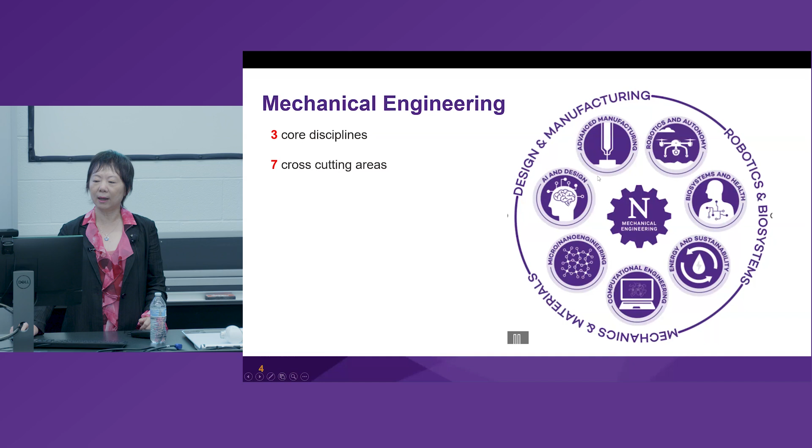And I'm in design manufacturing, and we have robotics and the biosystem group. So we're working on what we call 7 cross-cutting areas, including AI design, advanced manufacturing, micro/nanoengineering, and so on. We have a slightly bigger department, maybe 31 core faculty, and 10 of them are jointly appointed with other departments.

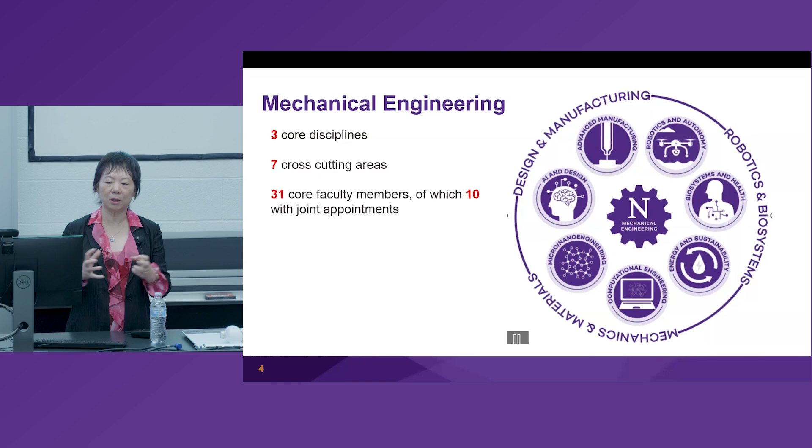So it's very much Northwestern's culture, enabling and encouraging collaboration. One thing I'm very proud of in my department is a really high scholarship standing. We currently have 6 NAE members. Actually, I think 5 of them, all 6 of them, were elected in the past 7 years, because our previous generation of NAE members either retired or some of them passed away during the pandemic.

Also, NAI stands for National Academy of Inventors, so we also have some people who are very great innovators, and 8 journal editors-in-chief.

You may be wondering about the ranking. We like to always use the research.com ranking, which ranks mechanical and aerospace together. So far, Northwestern has been ranked number 6 in the world, and I believe this ranking is very much based on citations. US News, oftentimes, is based on the rating or ranking of the department chairs.

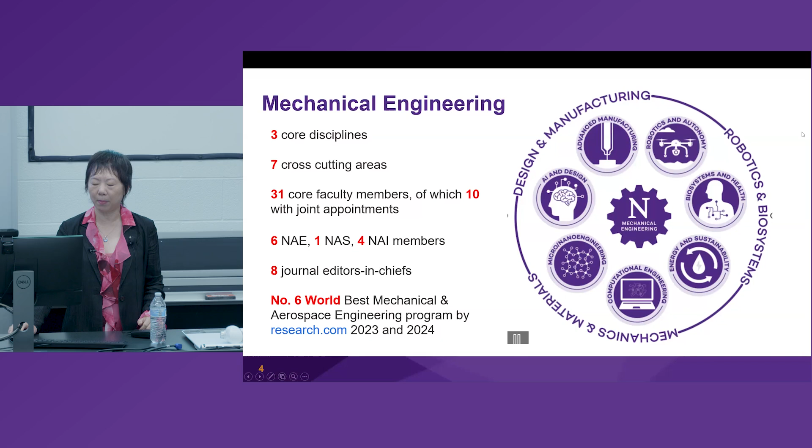Oftentimes we feel the size helps. In our case, our size is much smaller than some of the high-ranked departments. So I'm very proud of the department and working with a lot of talented faculty and students.

So the past year has been really exciting, as we actually started working on 2 new engineering research centers. One is the one that was awarded this year, called HAND. This was initiated by my robotics colleague Kevin Lynch at Northwestern. It's a center looking at building an artificial hand, a robotic hand in this case, to augment human ability.

So these are AI-powered methods to empower or build very dexterous, meaning very light, compact, robotic hand systems that can work on different tasks, for example in manufacturing, in healthcare, as well as jobs that are very dangerous to ask humans to do. So this center is about building this robotic hand.

And this is exciting because this is the first Northwestern-led ERC, and you can see some of the other collaborating institutions. Usually an NSF ERC involves 10 years of effort and involves at least 5 or 6 different institutions.

The one that I'm more involved in, that was mentioned earlier, is called HAMMER ERC. That stands for Hybrid Autonomous Manufacturing, moving from evolution to revolution.

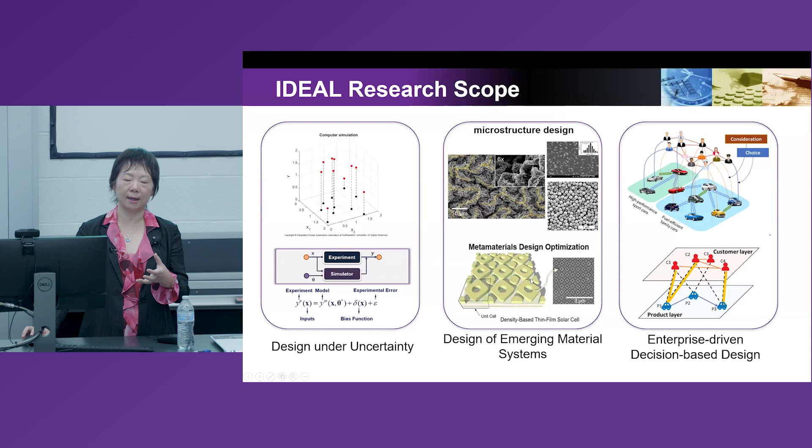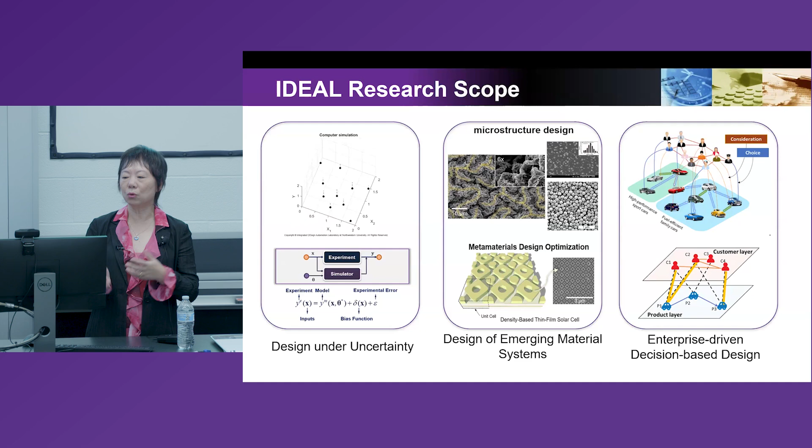Those material systems can be microstructures at a very lower scale level, like nanoscale, or they could be metamaterials that focus on architecture design. There's a big difference between these two kinds of systems. First, the manufacturing techniques are totally different. For metamaterials, you can use additive manufacturing to precisely produce the architecture. But for material systems, methods like extrusion or polymer mixing lead to very stochastic behavior of the materials. They look like a random material system, but actually there's an important pattern behind it. So one is stochastic, one is deterministic, and the methods to support them can be very different.

So today, the topic I'm going to focus on is really showing you a wide range of methods we are using or developing.

But first, a few words about why this topic is important. Advanced materials refer to systems that can achieve superior performance, and they've been used widely in energy, defense, and even healthcare. In this example, it's a magnetic-driven robot that goes into the human body, like for cleaning - this is actually robotic endovascular surgery. So this is a programmable material system.

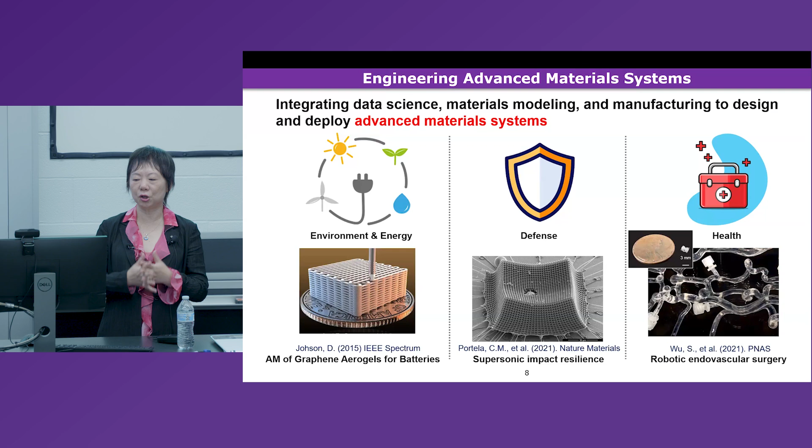There's a lot of good impact, but if you look at this topic itself, it's not just engineering design. I view this as an interdisciplinary topic, because I've been heavily collaborating with people in materials, manufacturing, and mechanics during the past decade in order to show that we can really design something that achieves the performance we want.

Looking at the portfolio, I'm listing here some examples of systems we've been working on, and underlying this is a wide range of funding agencies. Another reason I got into this field is that there seems to be growing funding put into this area from a wide range of funding agencies. Also, uncertainty methods play a big role, which I'll show you later - why uncertainty techniques are useful here.

On the left is what we call design of material. Those are things that can range from microelectronics, very inorganic systems, to soft material systems like polymers and composites, and in the middle can be things like MOF, metal-organic frameworks. These are very different material systems I've worked on with colleagues from different disciplines, and the focus can vary - some are more at the atomic scale level, some more at the nanoscale level. Interestingly, the methods we're developing are generic enough to be used for many of these different systems.

On the right is what we call design with material. I think most of us here are mechanical engineers - that's probably the domain we feel more comfortable with, right? Here, oftentimes we're given one material and we design the structure. It could be a composite structure, it could be 2D, like a solar cell surface pattern. I'm showing some other metamaterial applications such as mechanical cloaking and energy absorption. So the focus here is architecture design, structure design.

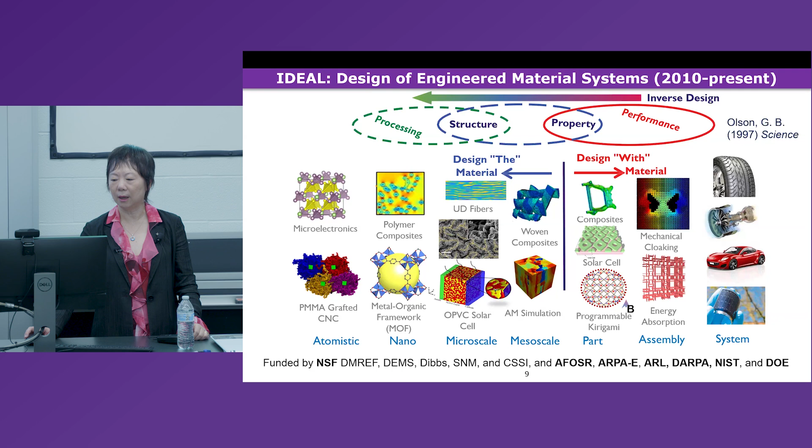In addition to material design, we also need to design the shape, topology, or size of a structure, which has important implications on its performance. Related to the slides I showed earlier, material design itself is often confined or restricted by what manufacturing technique we have.

In recent years, with the HAMMER ERC, I'm getting into a new paradigm called digital twin. This is a paradigm that creates digital replicates of a physical system and uses that to do decision making to guide the operation of a physical system.

Manufacturing is a dynamic process - you have to decide what kind of laser power you use for additive manufacturing. But building digital replicates is not the only interest in digital twin. What's important is this link between the physical and digital system, continuously using information or data collected from the physical system to do what we call model predictive control, using optimization and physics-based models.

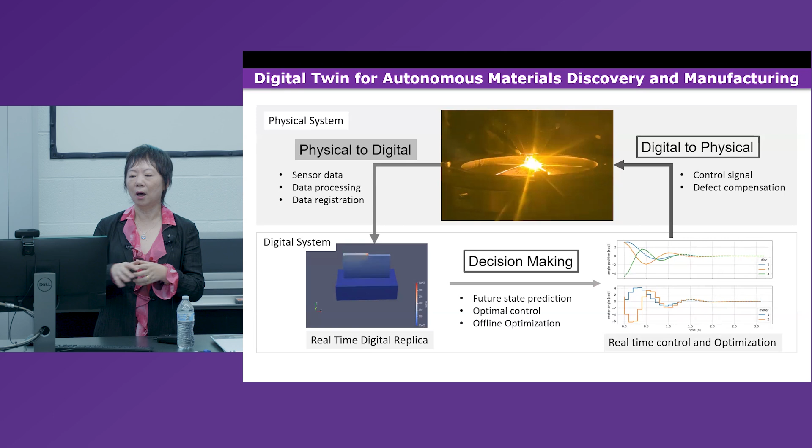I'm not going to go into details on this topic, but if you're interested, there are papers already published on digital twin. Today I'm going to talk mainly about structural, composition, geometrical design, and how we combine them, not so much on manufacturing process design.

I want to use turbine blades as an example to show you the design research now - the challenges we face, and the interesting aspect of designing what we call heterogeneous material systems. Turbine blades are a good example where at different locations, like the bore, the rim, the blades, you actually want the material to be different.

You want the inner side to be fine grain for strength and fatigue resistance, and the outer side coarse grain for creep resistance. And then for the blades, you're looking at a single crystal material for strength, creep, and fatigue.

An ideal system actually isn't only 3 materials - it could be continuously changing. We call this continuous material design, and I'll show you some results later on. It's in a DARPA-sponsored project called METAL.

It's exactly the kind of system where we need to integrate material with manufacturing capability, which is additive manufacturing - it can deposit different material, even different composition of different alloy, at different locations, and try to achieve the best performance.

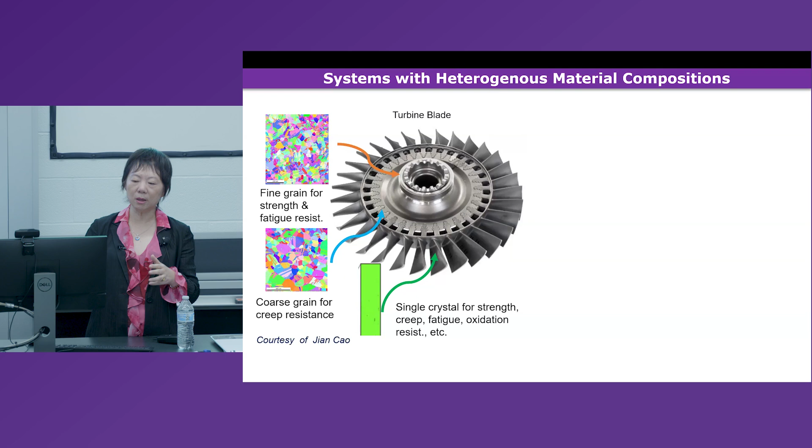This is important not only from the performance point of view, but also from the cost point of view. Because from the performance point of view, you'd say put the most important critical material everywhere, but that's very costly. So you want to use what we call earth abundant material, rather than the rare, costly material.

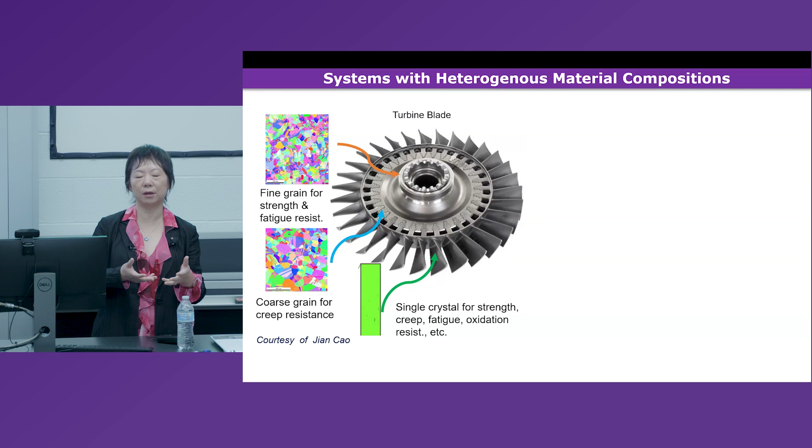So how do you do this distribution of material? That's a big optimization problem.

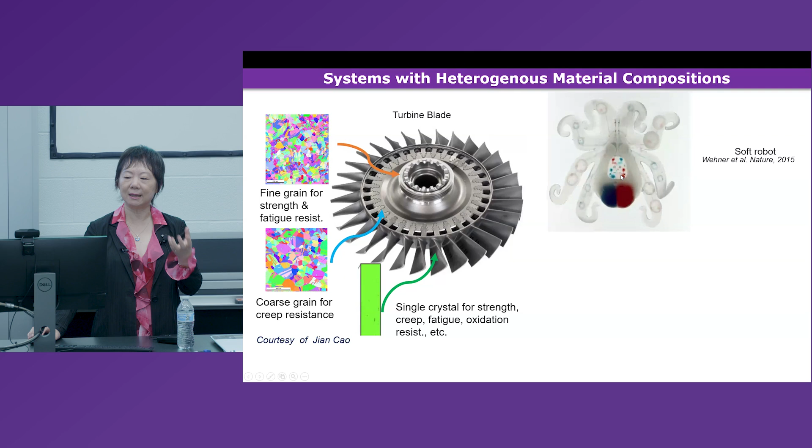If we look at soft material - you've probably heard about soft robots - they deform to a certain desired shape, and this can be accomplished by controlling the strain at different locations. Each location of the structure will have a different desired strain, and this strain can be achieved through different structure design.

So to achieve different material properties, you can do this by two means. First, you can change your material to achieve different property. Second, you can change the structure - that's the key idea of metamaterials, playing with the architecture to achieve different properties.

In this case, it's an optical device where you don't see the human hand - it hides, because surrounding this device, in this ring, there's an optimum design that puts different properties at different locations. So in this case, it's optical related - with this structure, when light comes in and goes out, you won't see anything in the middle. It basically hides the object by controlling the property in the surrounding area.

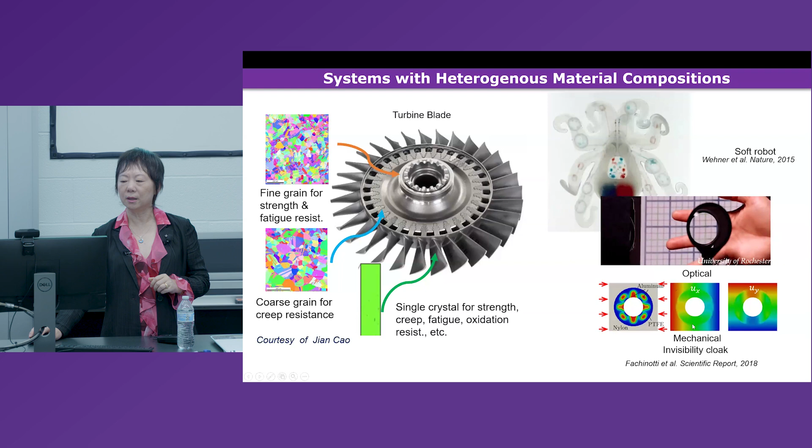The answer is it highly depends on the manufacturing processing technique you're using. But some methods are much better than others because they have smaller dimension, or what we call reduced dimensionality representation. So in our research, we looked at how we reduce the dimension so we can handle the optimization more effectively.

There's also a mixed variable problem, where some of the variables are continuous and some are discrete, like what kind of filler we should use, what kind of matrix we use for the composite. All these are discrete choices. So you have this mixed situation that you have to optimize together.

And if you've done optimization or taken an optimization course before, you know that when you have a mixed variable problem, the search suddenly becomes very challenging. Historically people use genetic algorithms, and I will show you a method we developed that we think is more effective than genetic algorithm.

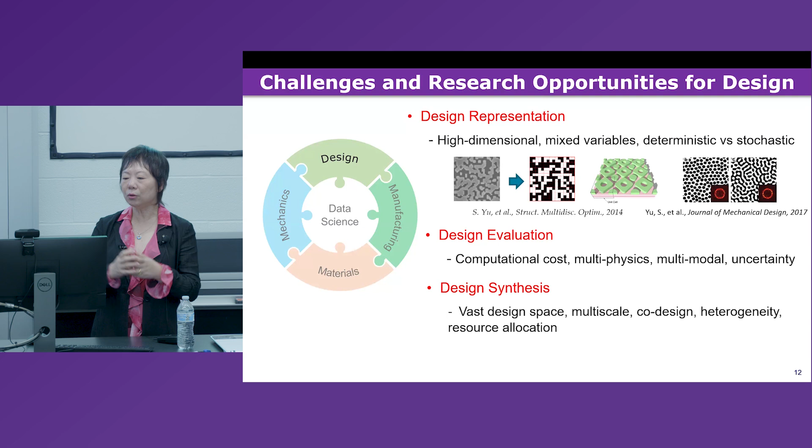Finally, there's the challenge of design synthesis. Synthesis means, given the requirement, how do we explore this space inversely? Analysis is usually forward, synthesis is inverse. How do we explore this vast design space?

And oftentimes it's multi-scale—nano, meso, macro. And how do we do co-design, meaning material, device, process, geometry? There are many co-design aspects, and the heterogeneity aspect I talked about.

Finally, it's a resource allocation problem: you have to decide whether you want to expend more effort towards collecting more data from computer simulation or collecting more data from physical experiments, so that you can make more informed decisions. So we view that as part of the design—it's not just design artifact, but we're designing the process of data collection.

That's something I feel my group is doing that's a unique aspect compared to many existing works that only look at artifact design—we look at the data collection too.

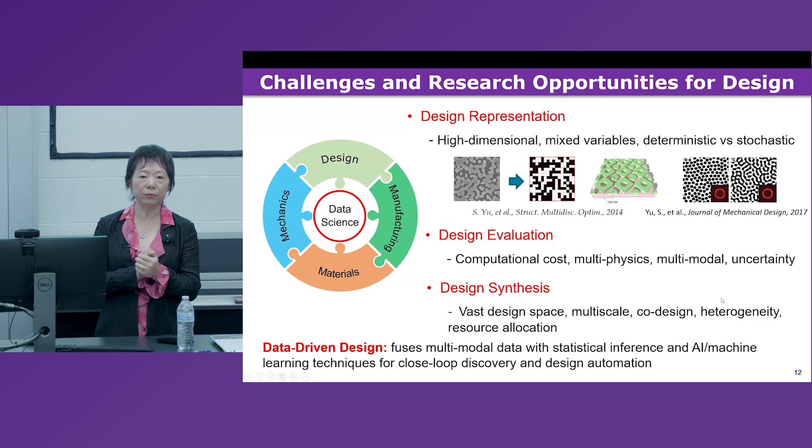So data-driven design methods basically integrate all this using statistical inference and also AI. I purposely listed both because statistical inference techniques usually deal with small data problems, while AI methods, which some of you are getting more into learning, are normally used for large data problems. In the design material system, we think both are useful, but they play different roles in the process we call closed loop discovery and design automation.

So now I'm getting into the main part. I already spent 20 minutes, but I will quickly show you 3 different systems and some different methods behind them.

One is starting with nanocomposite, focusing on morphological design and choice of composition, processing, and synthesis method. This goes into metamaterial, which focuses on architecture. The most recent work we're getting into is programmable material systems that are responsive to external stimuli—we call this intelligent material systems that can react to different stimuli such as light and temperature.

And then can accomplish multifunctional behavior—some people call this a multifunctional material system. So step by step, the nanocomposite system is a problem I'm giving you an example of here, called the nanodielectric. It's an already finished DMREF project working with people doing both modeling and experiments.

The design decision is the composition. In the composite case, it's what kind of polymer, like either PS or PMMA. The synthesis method here includes a surface modification technique, and we have 3 different types of technique we're considering.

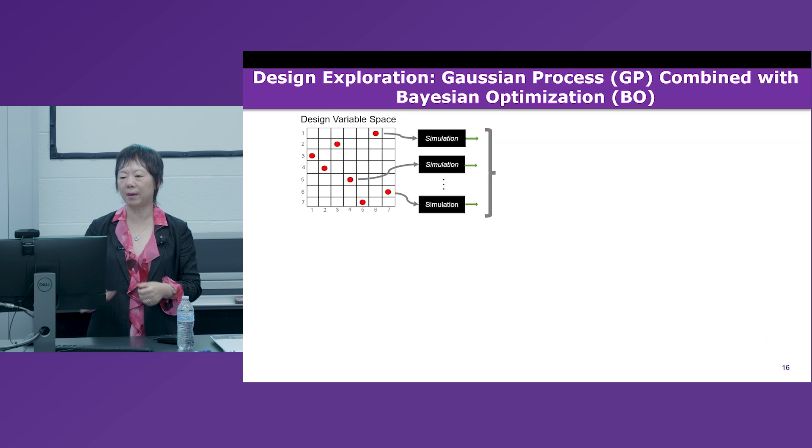We found that this method is very helpful, useful for small data problems. This is what I call the statistical inference method. You start with some data collection and use a Gaussian process to build a machine learning model. This model has the capability to tell you the uncertainty at locations where you don't have data. You can see that with 4 data points, assuming a single variable, there are infinite ways the curve can pass through these 4 data points - green, red, blue, right?

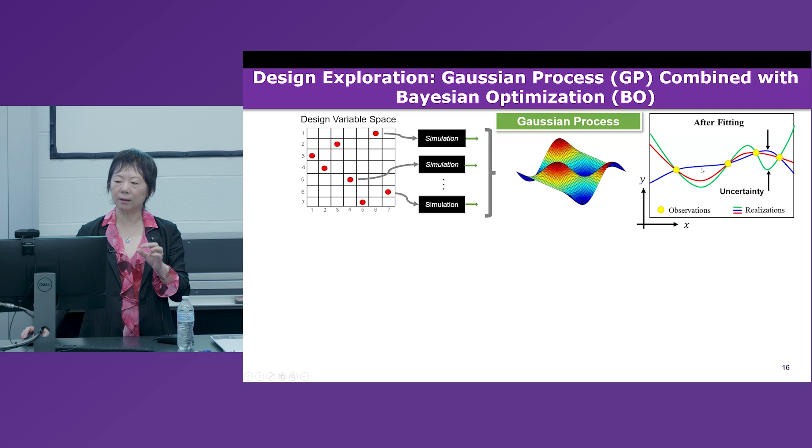But this method, Gaussian process, uses a correlation function. It can tell you at the location you don't have the data, based on the distance between the data as well as the behavior, how much is the uncertainty. So with that information, we could now decide how we pick the next data points.

This is done by something called the acquisition function in Bayesian optimization. It makes a trade-off between exploring more in the space, which reduces the uncertainty, versus trying to optimize the behavior based on the current function. So here we're doing minimization, let's say.

You can say that this point is the optimal result, right? But on the other hand, because the model is still in the early phase, there's a question - maybe somewhere here there's huge uncertainty, and the behavior can be even better than what you currently have. So it's a trade-off between exploration and exploitation. That's called the acquisition function, the key idea in Bayesian optimization.

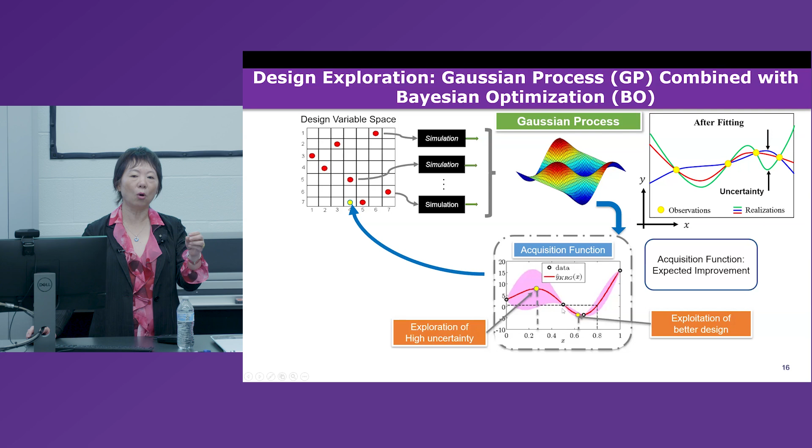So you pick the next point by maximizing this acquisition function, add it to the data pool, continuously update this model, and at the end you will find the so-called global optimal solution. The global solution can handle very highly nonlinear behavior.

So our extension of this method is that it has been primarily used for continuous behavior. It cannot deal with inputs that are qualitative. So here we are introducing a new set of variables called t. x is continuous, and t is the category variable.

I'm giving an example here - the category variable, say, can be the shape of the structure. It could have 3 different possibilities there. Instead of using a physical descriptor, where we don't have a good idea what the underlying descriptor is to describe the behavior, we actually create a latent space, an artificial set of continuous variables.

In this case, identifying the location of this different level in this space becomes an additional variable when we try to do the maximization of the maximum likelihood function. So conventionally, when you only have continuous variables, you identify the variance, covariance, and roughness parameter. Here we're introducing z, the latent variable. In this case, 2 coordinates, meaning each of 3 levels means 6 latent variables we have to add to this curve fitting or optimizing the likelihood function.

Once this location is identified, it's a supervised learning - it has a physical meaning. When the 2 levels are very close to each other, it means their impact on the response of interest, Y - which can be the property you're interested in - the correlation is very similar, or the impact is very similar. When the level is very far, like triangle is very far from this shape, it means its impact on property is very different.

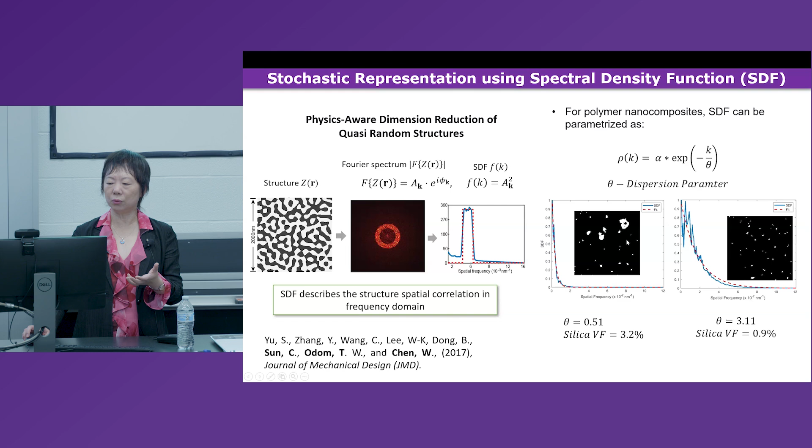For the nanodielectric material, what we did is that my collaborator, Linda Schadler, her lab actually produced many of these materials using different processing conditions. We did image analysis, and later on we found that this shape of the spectral density function, with 2 variables - one is the dispersion parameter, another is the alpha coefficient - together with volume fraction, are sufficient to represent different types of microstructural morphology.

So for morphology design, we only need 2 variables in this case: theta and the volume fraction, and these are continuous variables.

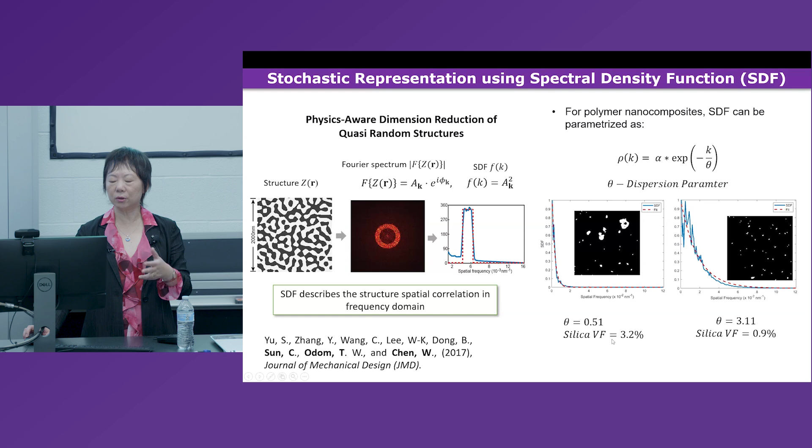Using the GP method as well as Bayesian optimization, here what I'm showing is the process of how the data are picked. Initially we start with some data points that are randomly selected, which we call the random initial design. After that, using this acquisition function, it starts to pick points.

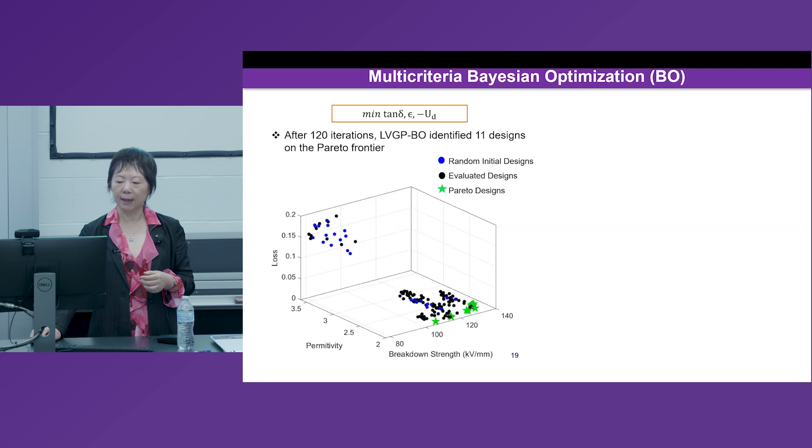What's interesting about the contribution of our work is that we can deal with disjoint design space now, because we have this smooth function called LVGP, latent variable method, that can link the two disjoint spaces. In this case, the disjoint spaces are related to different kinds of polymer. On this upper corner is all PMMA, and the lower corner is all PS. The surface treatment method is actually spread around.

This is the Pareto frontier that looks at 3 different criteria that we're interested in. The green points, the star points, are what we call the Pareto frontier. At the end, these are the good designs that you can choose, showing different kinds of morphology that you have.

You can imagine this could be a method that can guide either a purely physical experimental-based process, or simulation together, simulation only, or simulation with experiments. In our case, we actually have both simulation and experiments, and we are exploring different kinds of morphology and different kinds of polymer choice.

We found that compared to genetic algorithm, this is our approach using Bayesian optimization. It is statistical because it depends on the initial design being random, right?

Initially we pick like 30 sample points, so that could lead to different processes. We tried many different repeated, different starting samples and looked at the statistical behavior.

On the right is genetic algorithm, which also randomly explores the space. You can see that the Bayesian optimization is much more robust compared to the genetic algorithm.

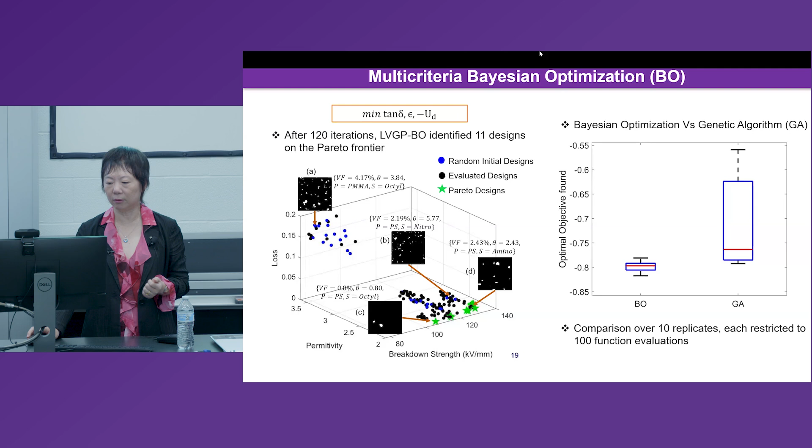So the data source, or the low fidelity, high fidelity, can be viewed as different levels, and now it can start to explore collecting data from different sources and different fidelities of model. So that's an interesting extension.

So I talked about the nanocomposite, which is a very stochastic system. Now I'm switching gears a little bit to talk about, if the material is already designed, how do we design the architecture?

Here the case is really high dimensionality, because if you think about structure design, if you think about a finite element, each element has a choice of either 0 or 1 or something else. This is the area where we found machine learning techniques are very useful. The high-end techniques like generative modeling, CNN, are becoming very useful.

First, metamaterial systems - it's an interesting kind of system, you've probably heard about the negative Poisson ratio, right? A structure that can achieve negative Poisson ratio. This kind of system also has very good energy absorption behavior.

It could be used in an auxetic structure for stent surgery that has both - it's like a spring structure, right - very strong, and at the same time it can easily and flexibly refract into different shapes.

In the optical area, there's optical metamaterial, acoustic metamaterial. This is something used in civil engineering.

You could actually - this is futuristic, we haven't seen that yet - design the concrete highway into this kind of structure. This is amplified so it could actually take the vibration of a car and convert it to energy. So it's an energy harvesting kind of structure.

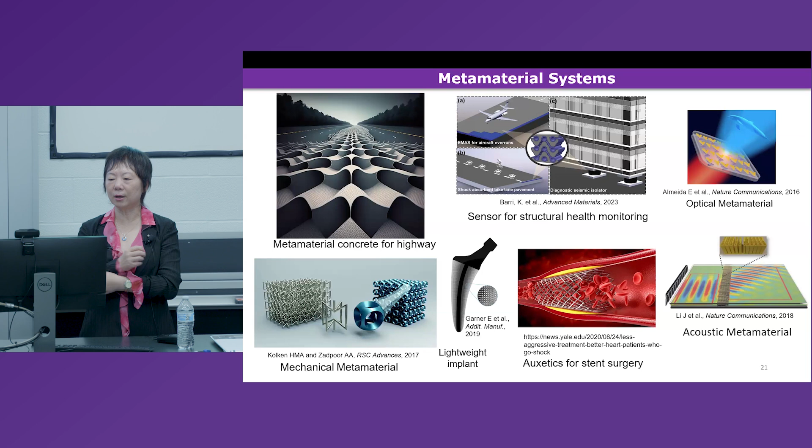So there's a lot of things you can play with in architecture to achieve different functionality. The challenge here is really the heterogeneity we want to consider.

I'd like you to imagine that the problem is like designing a butterfly. First, we have to design the overall topology of this butterfly, the shape, the wing shape. Secondarily, we think that each location of the butterfly should have a different structure, so it can achieve an ideal distribution of the property to achieve a certain function, okay?

Most of the existing topology optimization methods are only suitable for a material that's fixed. So we want to design heterogeneous structure. How do we do it? We actually come up with a data-driven method where we build a library of different unit cells—could be lattice structure, isosurfaces, or some other way of generating structure. There's an infinite amount of ways.

But the machine learning here, the input is the structure, the output is property. Here's an example, mechanical property—that's basically a matrix we call the constitutive law. It has C11, C22, so it's multi-element, very high dimensional in terms of output. This machine learning will tell us the behavior.

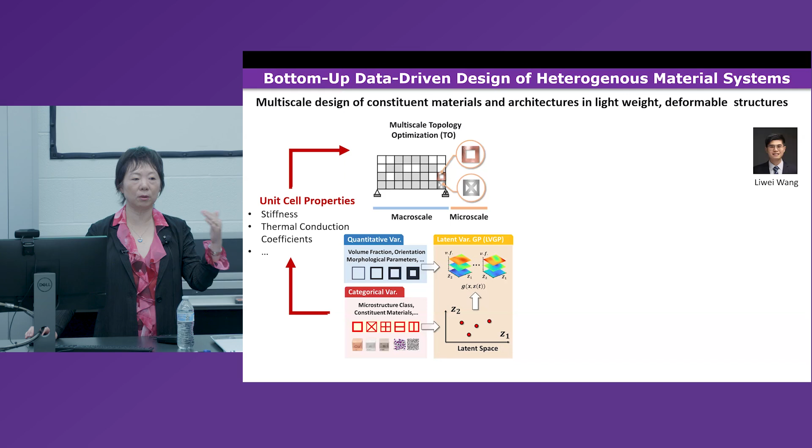So we developed two strategies. One is called bottom up, another is called top down. Both strategies combine machine learning with conventional topology optimization. At each location we rely on a machine learning model created using the dataset I talked about, and now it becomes a surrogate model that surrogates the constitutive law at each location. At the upper scale level, we still use the conventional topology optimization technique to do the optimization.

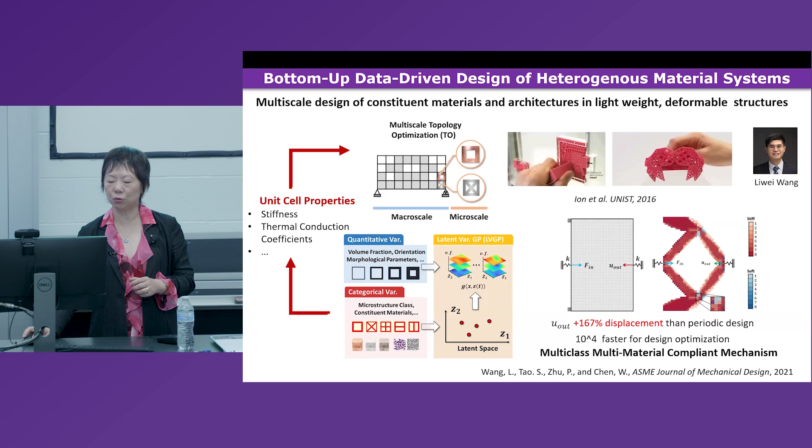So this is purely using this database, okay? And using the machine learning model, and then topology optimization, we can design this optimal distribution. So what is the model behind it? The machine learning model actually starts with a very different concept of the unit cell. We make sure they are all connected in this case, and also varying the different thickness, so that's the weight, right?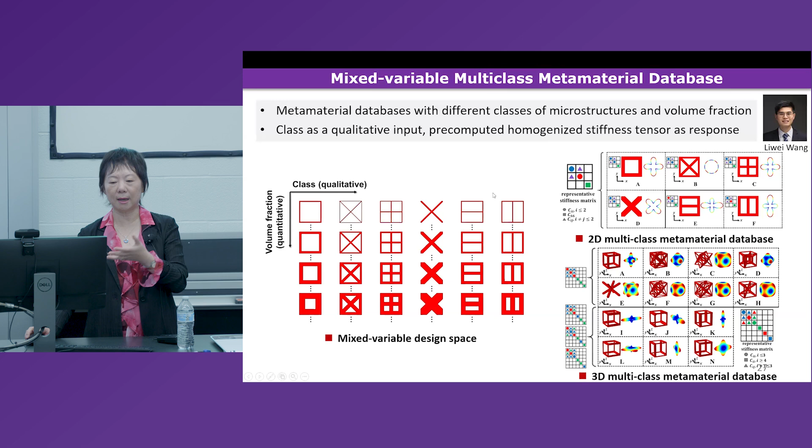With this LVGP, here we again use the latent variable Gaussian process model I talked about earlier, by treating the class as a category variable, a qualitative variable. In the latent space, we can actually see what are the concepts that are similar in terms of their property, and what are the concepts that are different. Like we have very similar observations in both the 2D and the 3D kind of structure. So this gives us some insight.

But what is interesting at the end is that this method can allow us to design a heterogeneous system. What if you say, I don't want to be confined to the existing dataset, right? I want to design something very arbitrary and free form. That's where generative modeling is useful. Generative modeling used like in ChatGPT these days, right? So how do we use it for unit cells, analyzing the dataset we have?

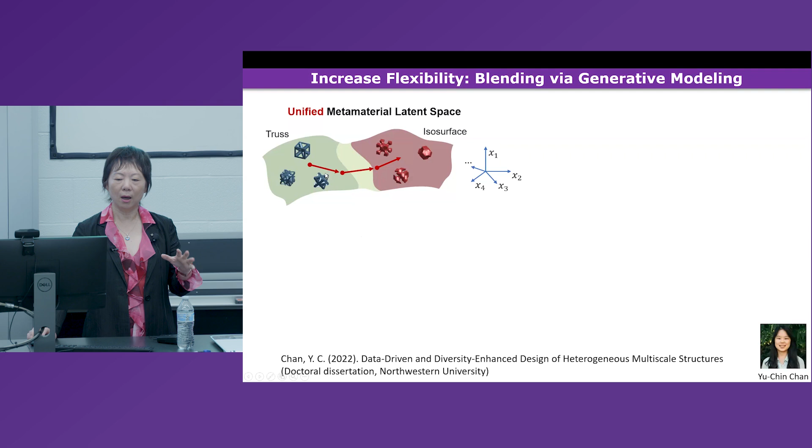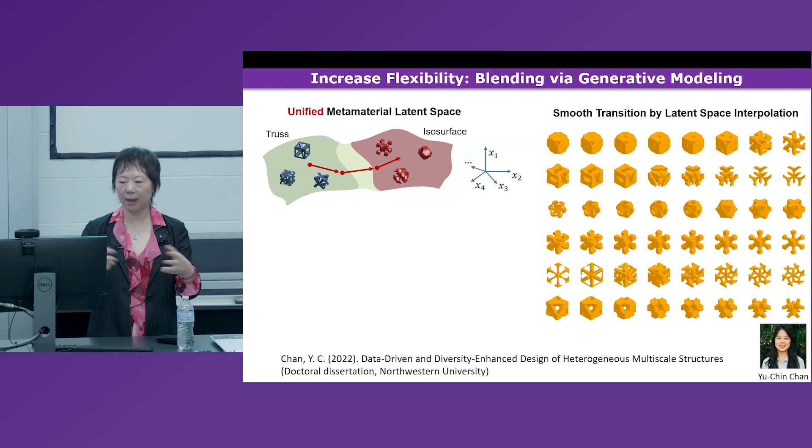We create a dataset where some of them belong to truss type and some of them belong to isosurfaces. Then we create this generative model, and now it can create very novel designs, even though you may argue they are interpolations of these different classes. But they're still very original designs, and they can still achieve very optimal properties because they are interpolation in the geometry space, but they're not necessarily interpolation in the property space, right? The property can still go beyond.

So with this dataset, we actually designed this acoustic metamaterial that achieves what we call a multi-class functionally graded structure, okay? You can achieve gradual transition of the property from one location to another. So generative modeling could be quite useful in creating new designs in this case.

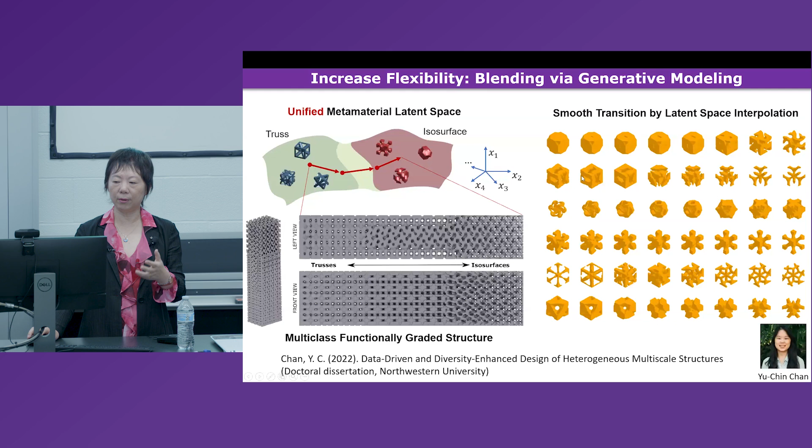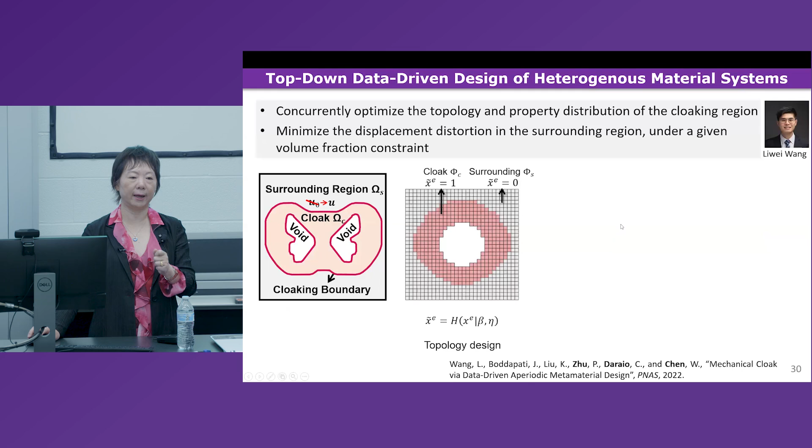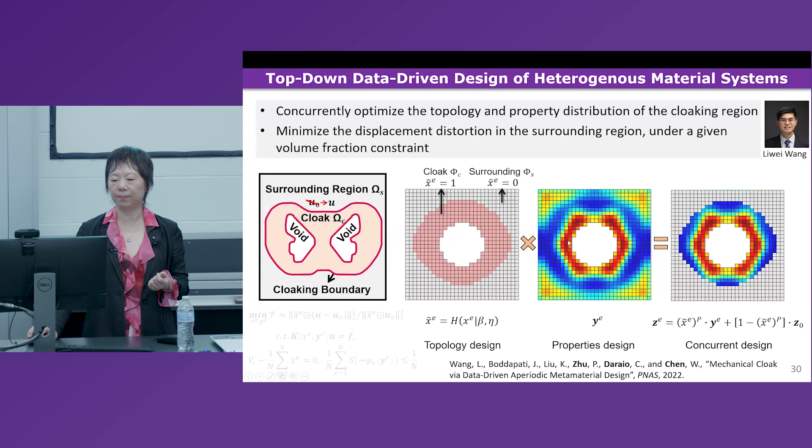Top-down approach looks at the problem differently. It starts with topology optimization and determines what is the optimum property at each location, and then retrieves the library and says which design or architecture is the best. So here there are two sets of variables. One represents the property, one represents whether we will have material with or without material, so 0-1 decision like we traditionally do in topology optimization, plus the property is a design variable at each location. This is done also by topology optimization technique.

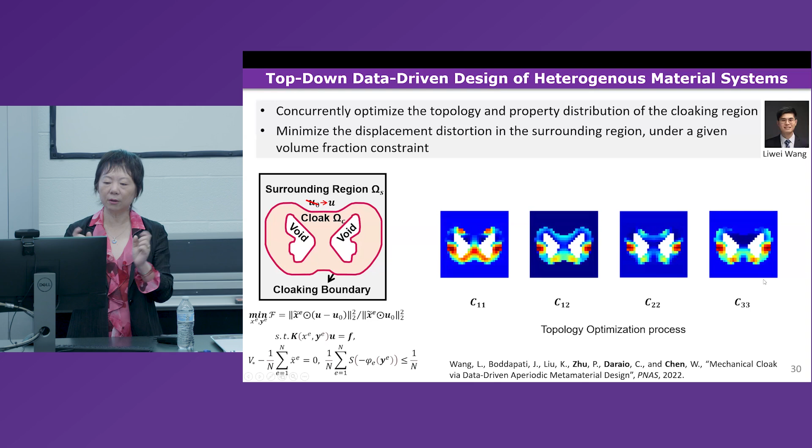What you're seeing here is the evolution of how C11, C22, C33, the properties converge to different values. Then we retrieved the library, and formed the final architecture, tested in collaboration with Caltech. The paper is published at PNAS to show that this is a mechanical cloaking structure — when you hide objects, you can imagine hiding different objects in the middle, and design the architecture like the packing structure surrounding it, and when you apply the load, the displacement is the same as without the object.

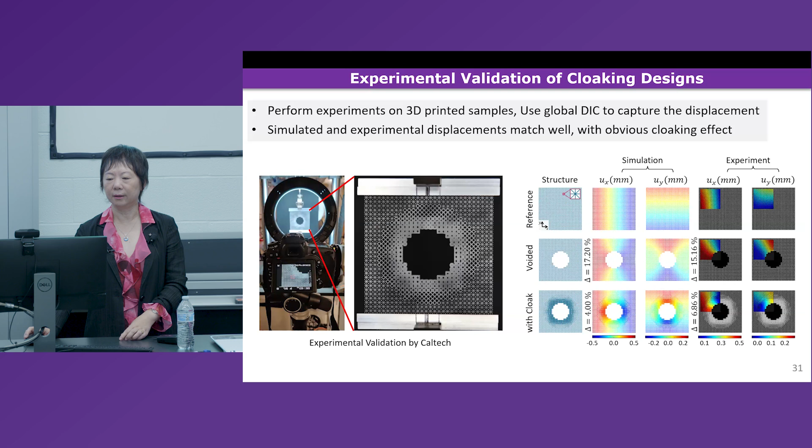So this is a good example to show the top-down approach. For the bottom-up approach, I want to show you another example. This is very new results, we're still writing the paper. This goes back to the turbine blades I talked about earlier.

This is the DARPA Metals project. Our team is a collaboration with GE, General Electric - we call it RADICAL, Rapid Array Dimple-based co-design of gradient material and geometry. The end goal is to design material for these turbine blades that we call continuum material design, meaning at each location the composition can be different. In our case, we consider 4 different alloys.

This is a project where the experimental research is more than half of the budget; the computational research is a small amount. My colleagues and also GE colleagues work together to design what we call the high throughput experiments that can test the material composition under different temperatures. Each location has this gradual gradient change of the material composition, and how you make it is actually using additive manufacturing.

And then testing, and we build a material model based on those data, then feed it to topology optimization that considers both thermal and mechanical coupling. One challenge in topology design is the gradient information that you need, especially when we deal with highly nonlinear behavior like creep behavior.

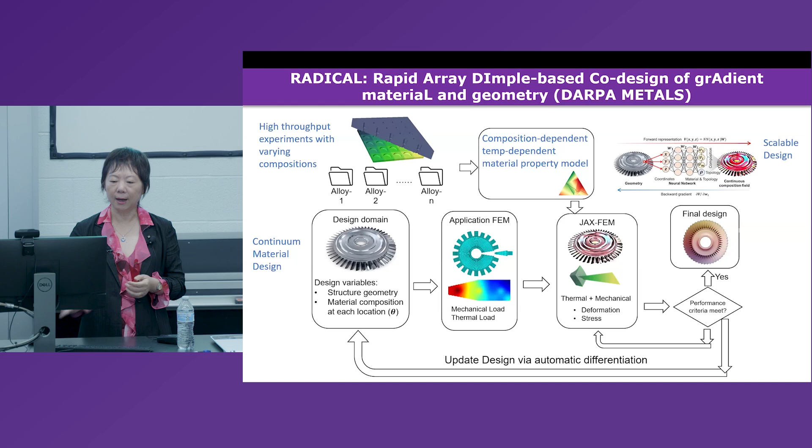The objective here is the cost associated with criticality. Criticality is about whether this is Earth-abundant or Earth-rare material. So we assign different costs associated with that.

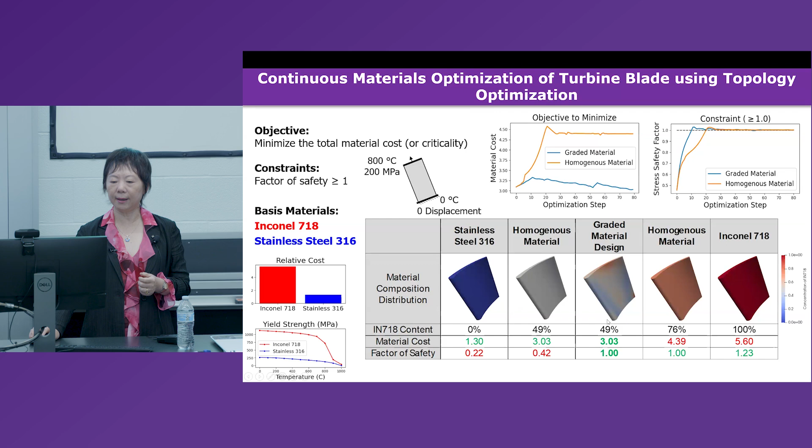This in the middle is the optimal graded material design. Here we're only showing two materials, Inconel and stainless steel. You can see that at different locations the material composition is different. Compared to single material using either one, or homogeneous material that is the same everywhere but has different composition, you can find that the graded material is the best in terms of cost as well as factor of safety, which is related to stress.

So it has this coupled thermal and mechanical analysis that we've already seen give a very promising result. DARPA really wants to accelerate the speed for both experiments as well as optimization. For optimization, they told us it should take less than 12 hours to get a design - given any geometry, like a turbine blade, you have to come up with the optimal solution. For the linear problem right now, it only takes 2 hours. So we're working on the nonlinear problem, like creep behavior and other much more difficult behavior, using the differentiable technique.

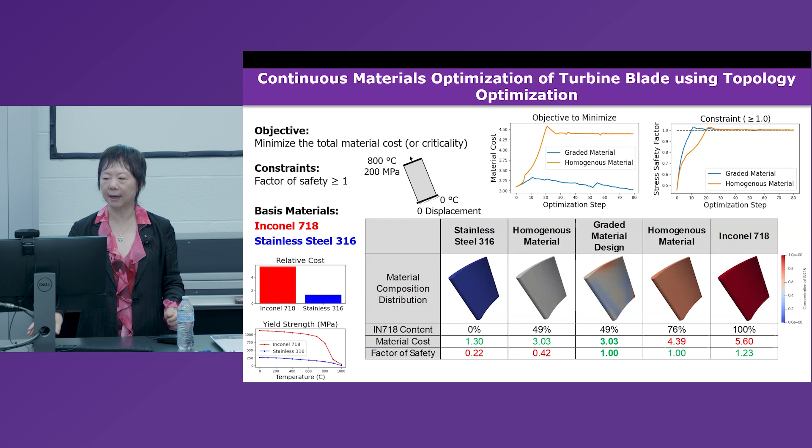The last topic is programmable material, which I'll go through really quickly now. This is a really exciting area that we call the intelligent material system. In addition to composition and architecture, we need to design the stimuli, which could be programmed, and we also need to design the material system. So we call it programmable material.

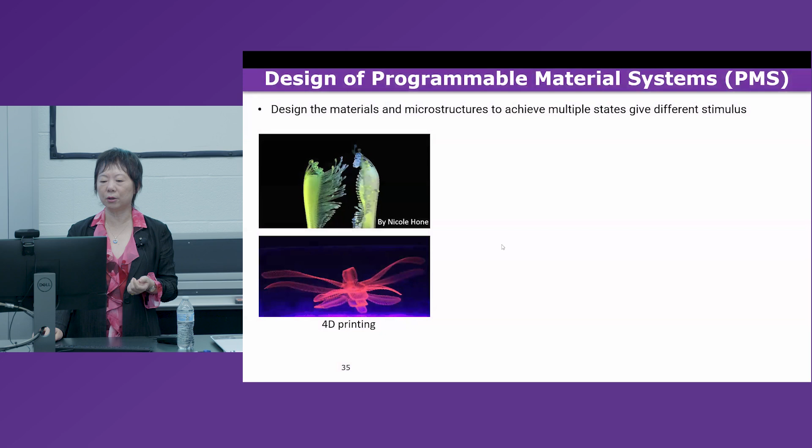This is my NSF-sponsored project called the BRITE Fellow Project. It's a single PI project, but I'm working with some younger faculty who really have the technology for what's called 4D printing, where you can build the stimuli into the system. Most of these systems right now are soft material, a combination of soft material and hard material.

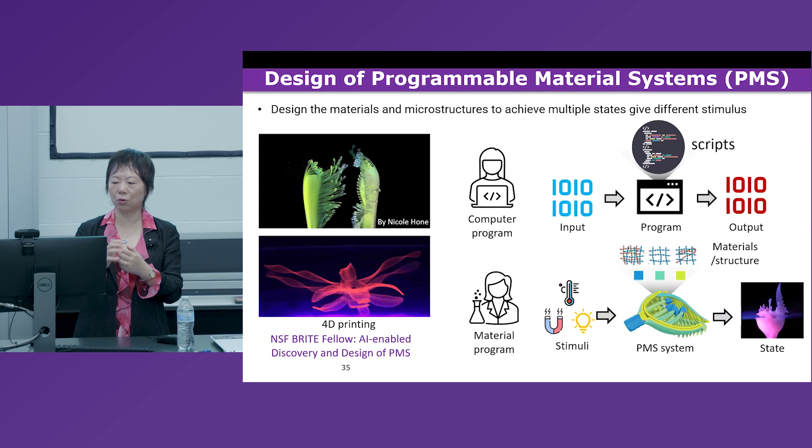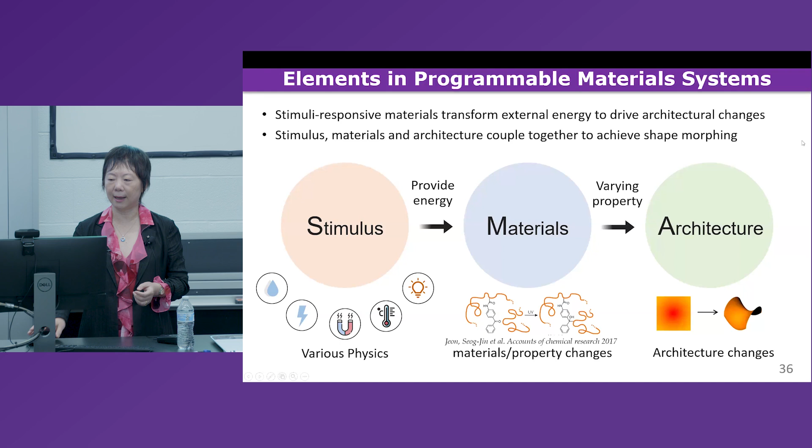We call it programmable because at each location it's like coding - you can decide what material you want to put and correspondingly what process condition you have to use. There's actually a strong coupling of processing condition with the material behavior. We already have some interesting results. From a design challenge point of view, the challenge is really this large design space: stimuli at each location, material at each location, and then the architecture. So how do we couple them together? That's really something we have to handle. So there are several things we are looking at.

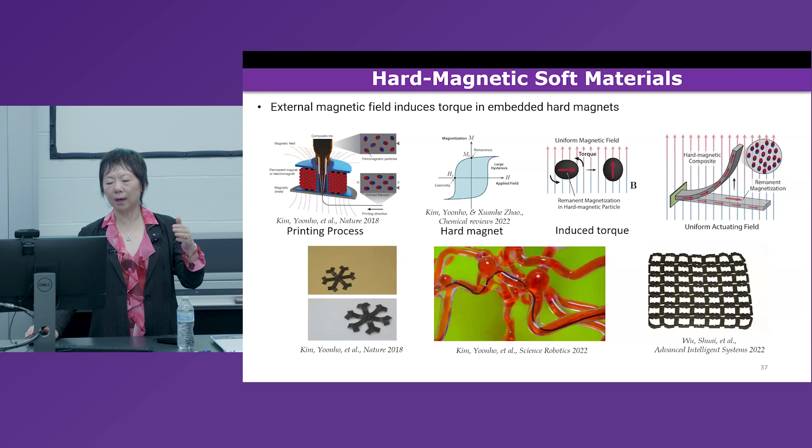This kind of system has to really respond and actuate. Actuation is a big problem. The externally controlled system had to have energy sufficient enough to create the actuation that you want. So here's an example.

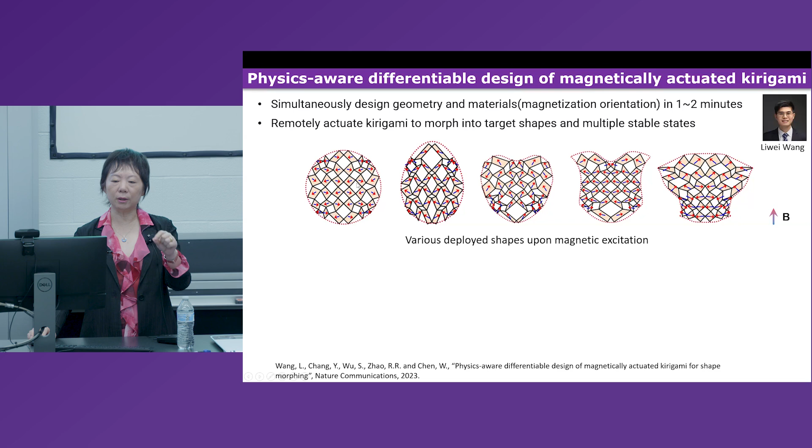This is already results published in Nature Communications, showing shape morphing using kirigami design. What you want to achieve is start with the same geometry, like a block, and decide where you cut your material. Each cutting point is a design variable, and for each element, the direction of magnetization is also a design variable. So it's a very high dimensional problem involving multiple physics.

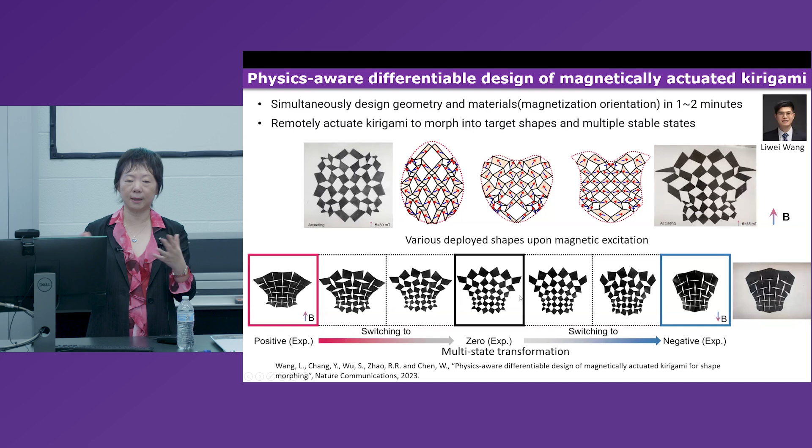For physical validation, this is from Renee's group at Stanford—they print this structure. These elements have different directions of magnetization, and it responds to the external magnetic field, shown here. The lower part shows they can achieve multiple states, from closing to opening. That's another challenge—it's not just a single direction, it's multiple directions.

Another one is optical. In the optical area, I know this department is very strong in fluid mechanics and turbulence, and I think this method has been heavily studied in those areas. It's called the neural operator approach for machine learning. We're using this for designing optical metamaterials.

The functionality is that you have a geometry, and when you manipulate the phase field, you want it to generate a targeted signal in the focused area—either one point or multiple points. In the past, we used traditional optimization techniques like Bayesian optimization, but we were never able to catch what the optimal geometry was.

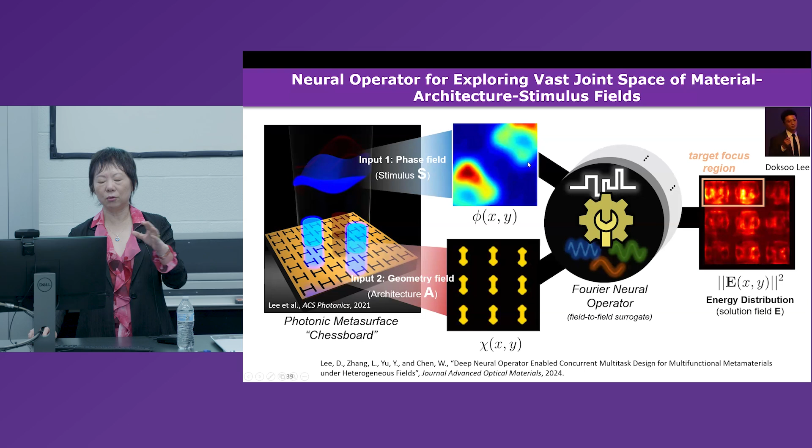Now here, the geometry could be different—we're designing the same geometry repeated. So the design space is both the phase field you're applying as well as this geometry. It's a very large dimensional space, and the optimal performance is the targeted location of concentration of the signal.

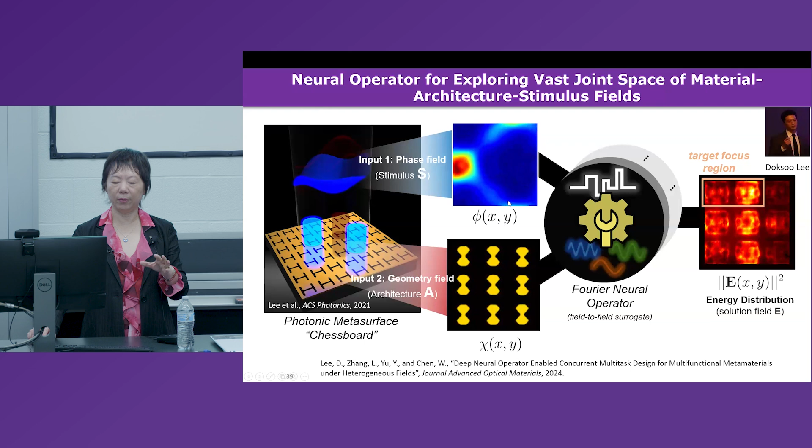So now we're using the neural operator, where the model input is a field—the field could be this phase field as well as the geometry—and the output is also a field. This machine learning model allows us to specify any targeted behavior.

I'm showing some examples. The training data set is about 400 different shapes and 36 different phase diagrams, combined together. This data set is used to train the model.

Now we can do concurrent design. For any targeted outcome, whether two target locations or one, we can accomplish different optimal designs.

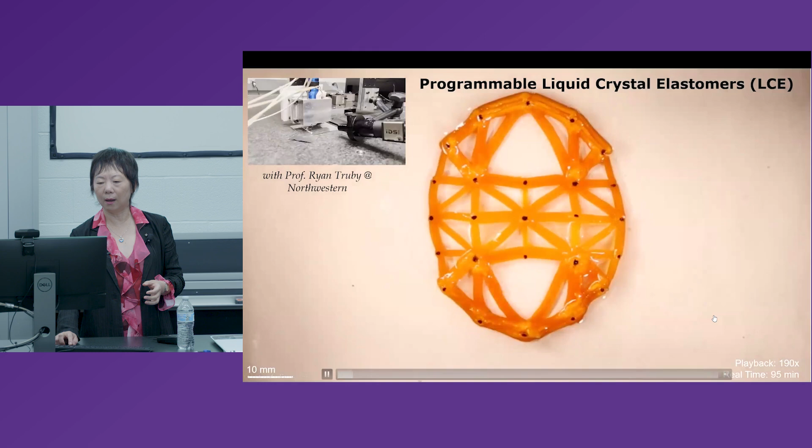Again, we use a machine learning model—I'm not going to go into all the details—to build, using data, the behavior of the model as a function of all this processing condition. Using topology optimization, we can design the node location as well as what kind of stimuli you should use. We could actually handle multiple stimuli right now.

And what is interesting with multiple stimuli is now we can design something. I'm going to skip through this, different speed, pressure, cross-section, each location is different. And you can see that it can go through the morphing process.

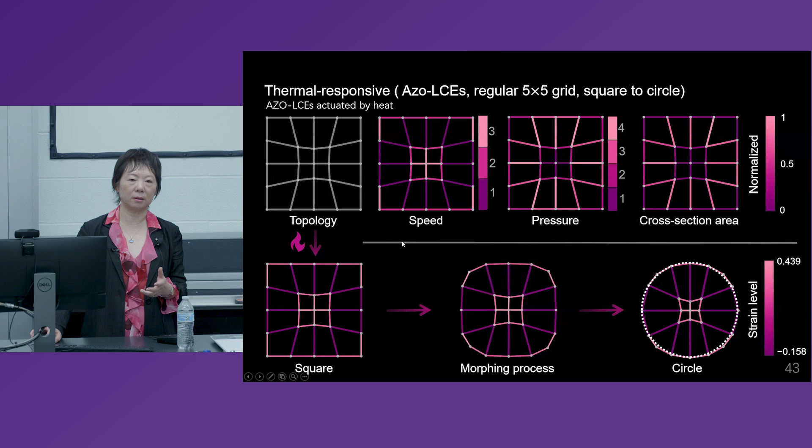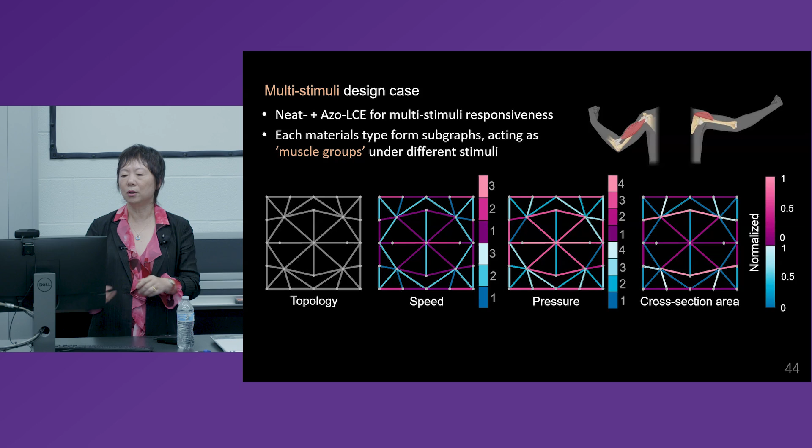But the future is thinking of this kind of system as what people call soft robots. The soft robotic system is one that can respond to different actuation to build what we call muscle. What is human muscle is accomplished by putting different material at different locations that have different strain behavior. So if you're in a soft robotic system, you also want different material at different locations that have different strain behavior that can react to external stimuli.

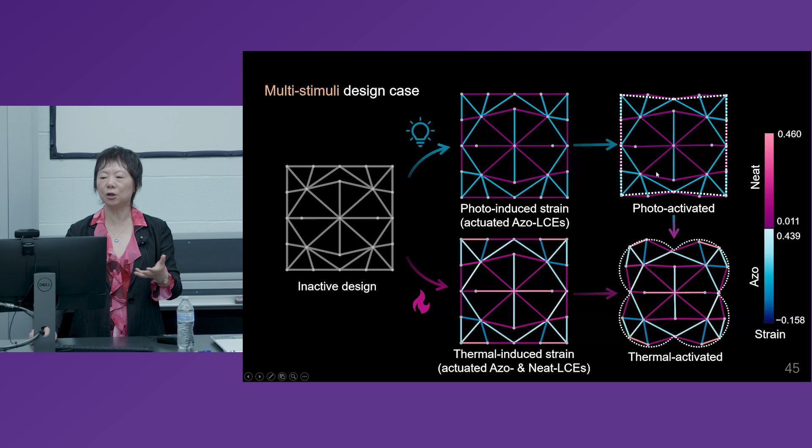In this case, we're showing both light as well as temperature. And you can see, in this case, one single design, two different stimuli lead to different deformed shapes at the end. So if you give me any shape you want, I can inversely infer what is the structure you can begin with.

I'm already exceeding the time, so just want to summarize here. In my research, we kind of also evolved, from material design to architecture design, now to programmable material design. And we have tried many different machine learning techniques - there are small data problem methods, there's large data methods.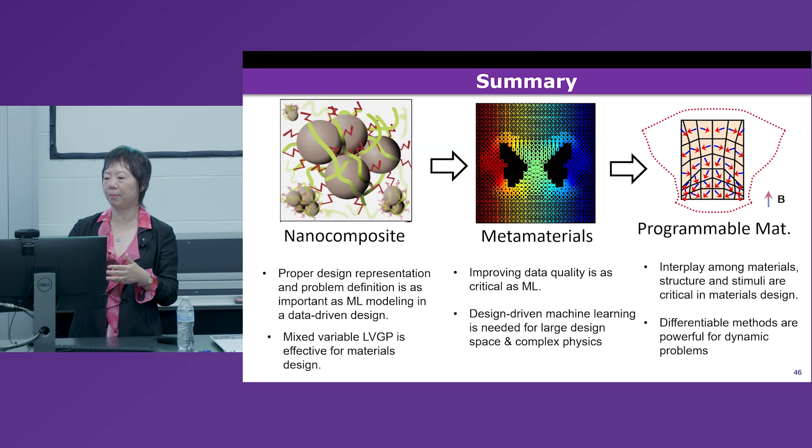At the end, we are getting into this domain where we have to also consider dynamic behavior, which is beyond the conventional static structure design, that we have to use methods like differentiable simulation in order to get the gradient information we need and model the dynamic behavior that we want. So thank you very much for listening.

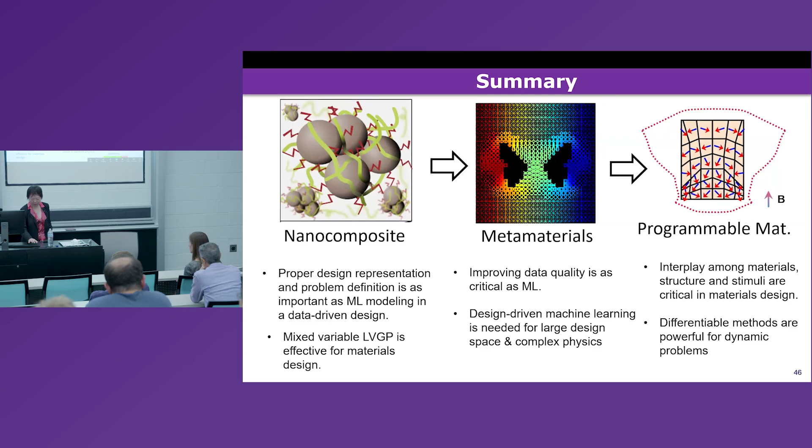Actually, these are not polynomials. These are more like some of the typical models we have, more like Gaussian process models. There's one - go back to the function that I showed, it's actually an exponential function.

But this method is not going to work for, say - this morning I talked to one of the colleagues here about ceramics, defects, those that don't have periodicity. It becomes very difficult. So this, we assume there's a periodicity, that from one region to another region, this pattern repeats.